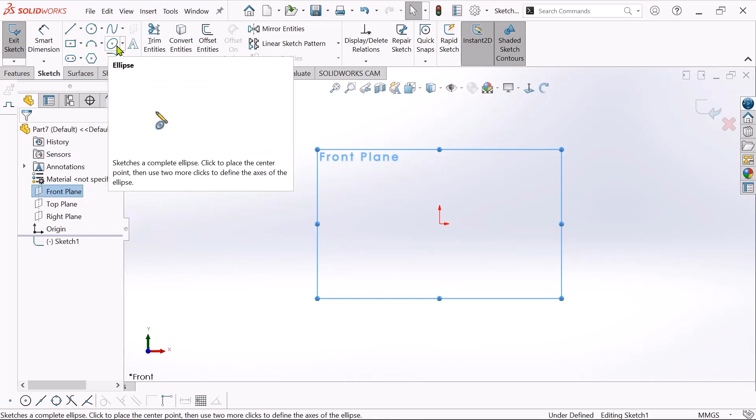Okay, let's start. Now go to front plane and sketch. Choose an ellipse, sketch the ellipse from this to this, and select OK.

Now go to smart dimension. Make it from this point to this point, 350, click enter. Again choose this point to this point, make it 700 millimeters, 700, and click enter.

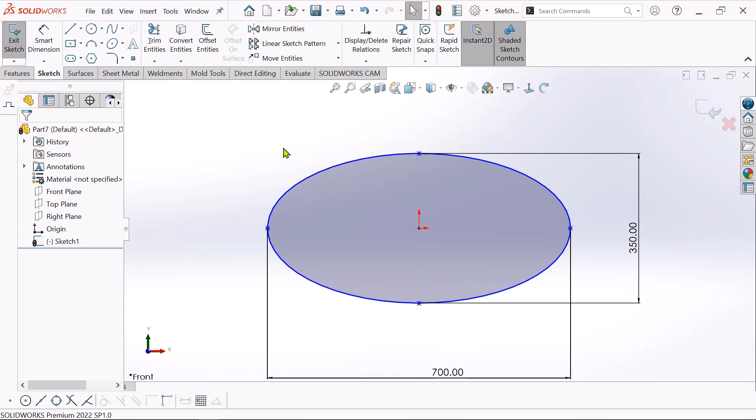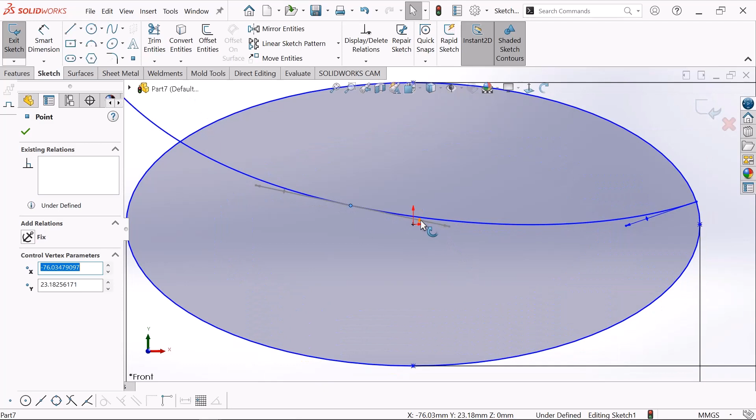Now again just select and sketch from this line to this line, and select OK. Now click this line and just drag it, this line and drag it, and again drag this, move it a little, drag it, yes, okay, and click OK.

Now just click this line and click offset entity, make it 20 millimeters, and select OK.

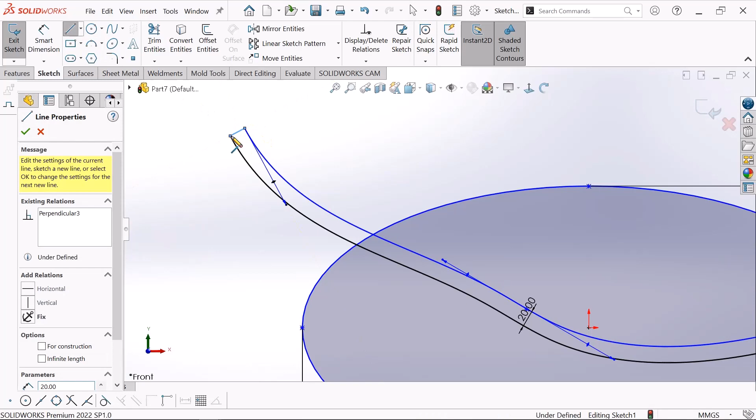Just go to this line and connect this line to this, select OK. Connect this line to this line, select OK. Again connect this line and this line, select OK. Just click exit.

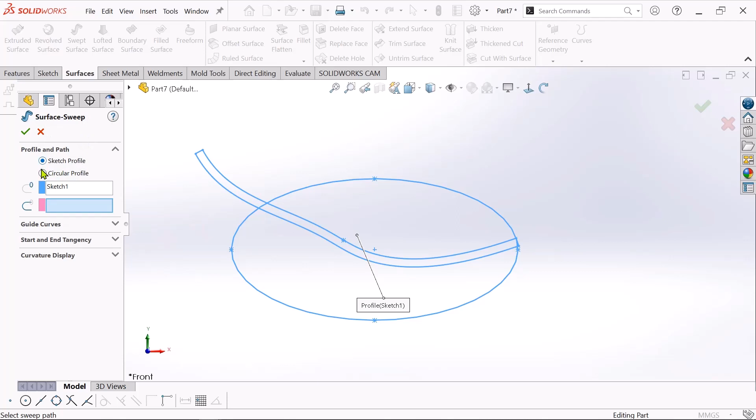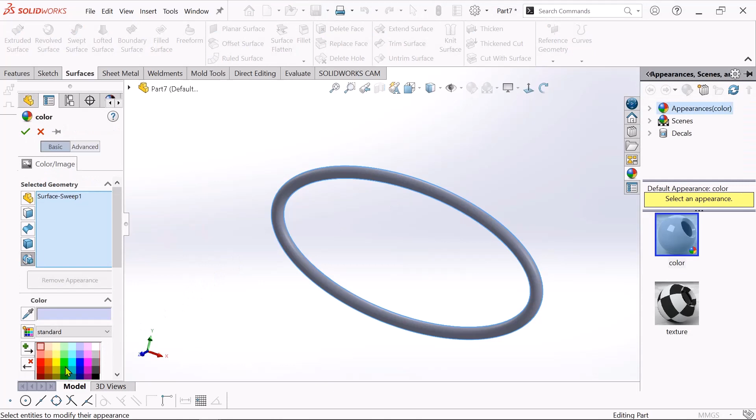Okay, just go to surface and click sweep surface, choose circular profile, click this profile and click OK. Make it 30 millimeters and click OK. Now click this and go to appearance, click this sweep brush and make it this color, click OK.

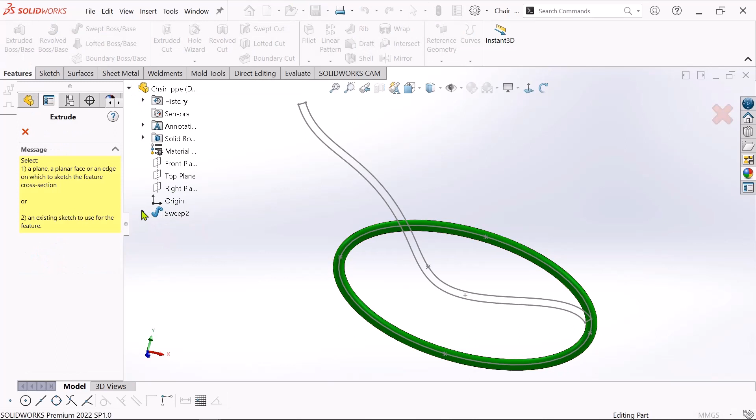Now click this and click show, select OK. Go to feature and click extrude boss, go to here and click this sketch, select this and this. Make it 350, merge result, and select OK.

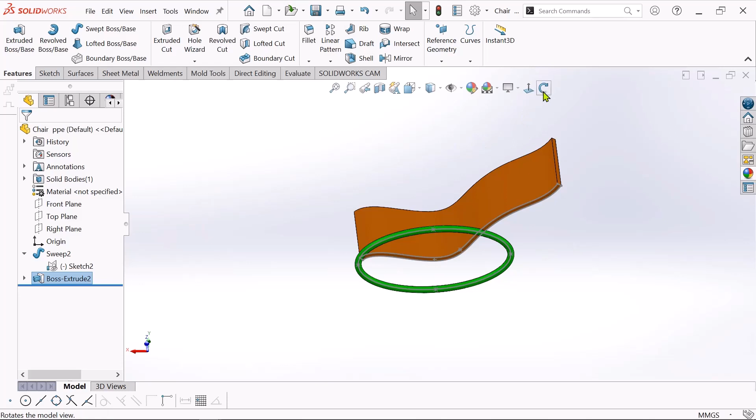Now go to plane, click plane, and select this point. Second reference is front plane. Click OK.

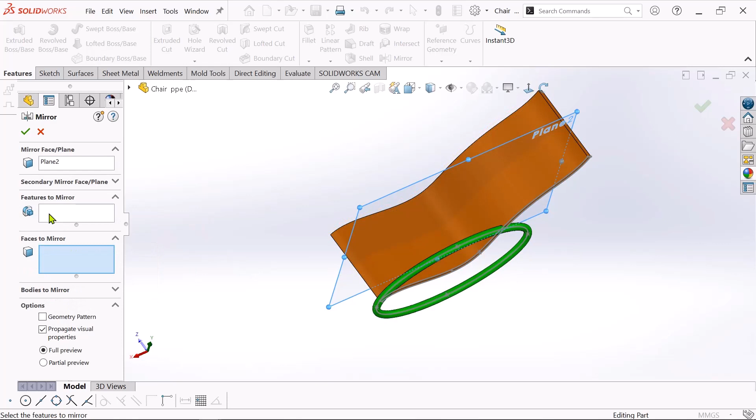Now go to mirror and click this feature to mirror. This is our feature, just click feature. This is our body mirror. Just click this feature, sorry, cancel it. Feature to mirror, this is our feature, yeah just OK. Click here, this is our feature to mirror, and click OK.

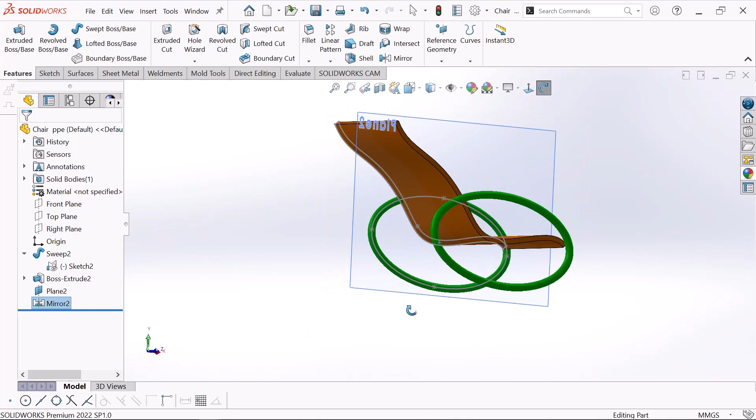Now see, both sides' circle is ready as a leg. Just click this and hide this plane.

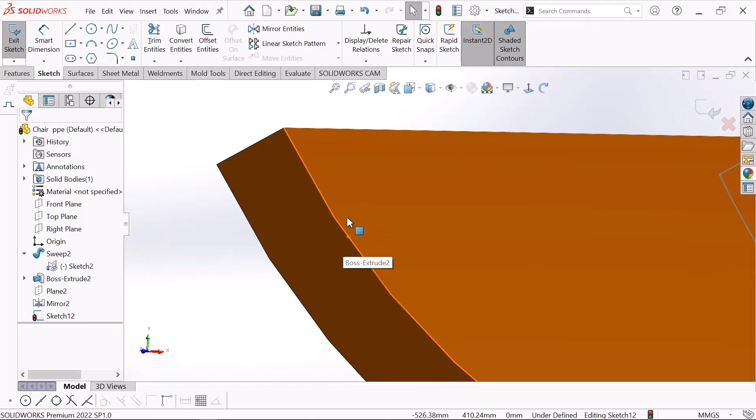Okay, just click this face and sketch. Now sketch a line from this line to this, and this line to this, and this line to this line, and this line to this line, and select OK.

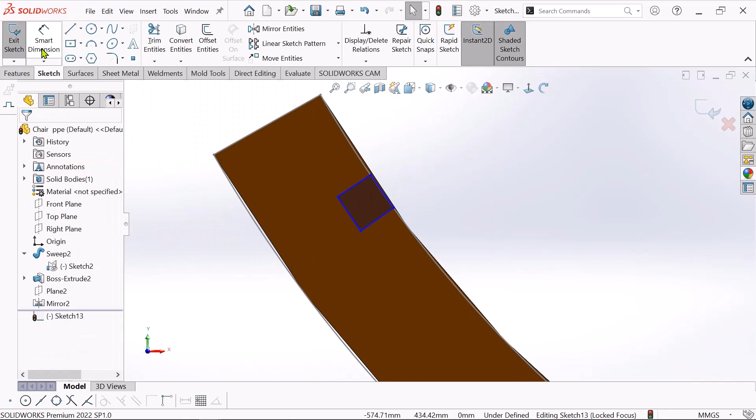Now assign the dimension from this point to this point, make it 20 millimeters, click enter. Make it from this line to this line, 2 millimeters, click enter, and make it 2 millimeters again, click enter.

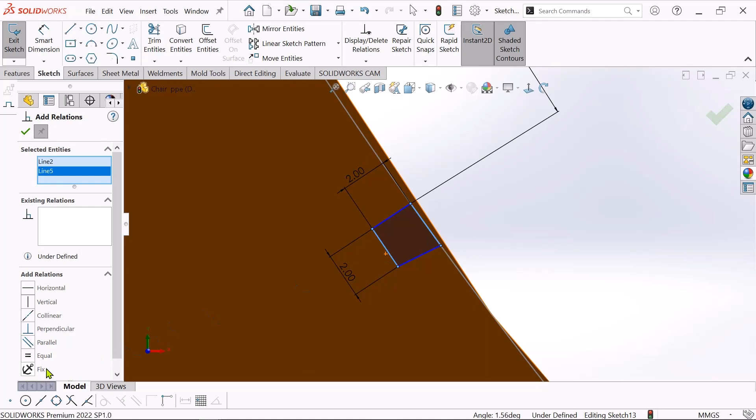Now go to add relation, click this line and this line, click equal, and click OK. Now our sketch is fully defined. Just right click, select OK, and click exit.

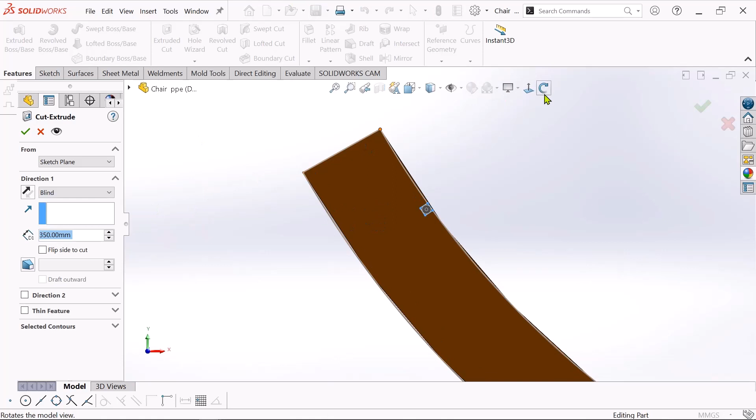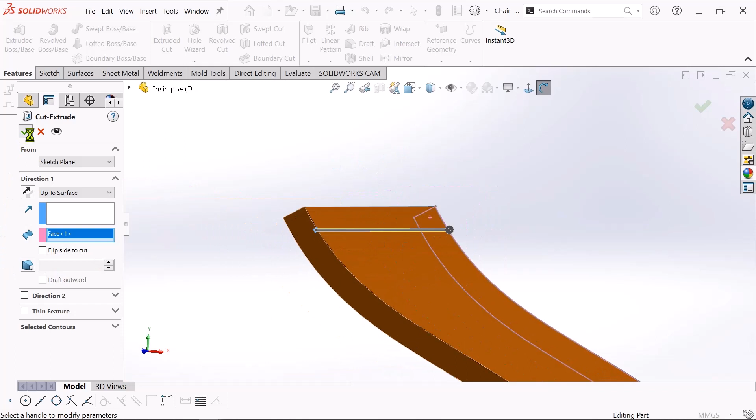Now go to extrude cut, just click this and click up to surface, and click this surface. Now click OK. Now see, our extrude cut is okay.

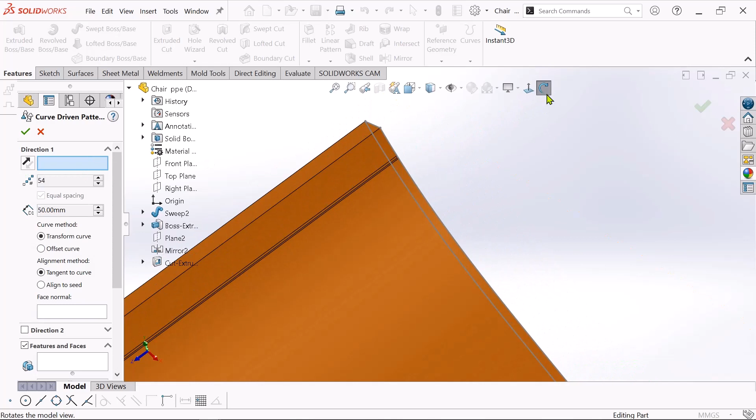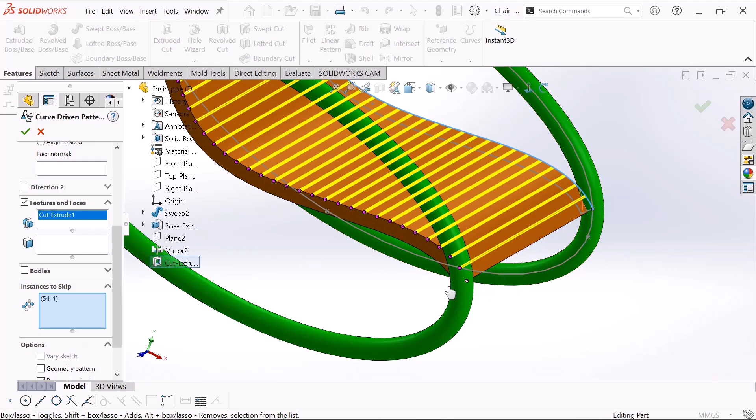Now go to this linear pattern and click curve driven pattern, choose this. Direction will be this line, go to Features and Faces. This is our feature face. Now our face is visual, so go to instances to skip, click this, click this because we don't need this. Okay, now click OK.

Now see, our chair is fully ready. Yeah, thank you.

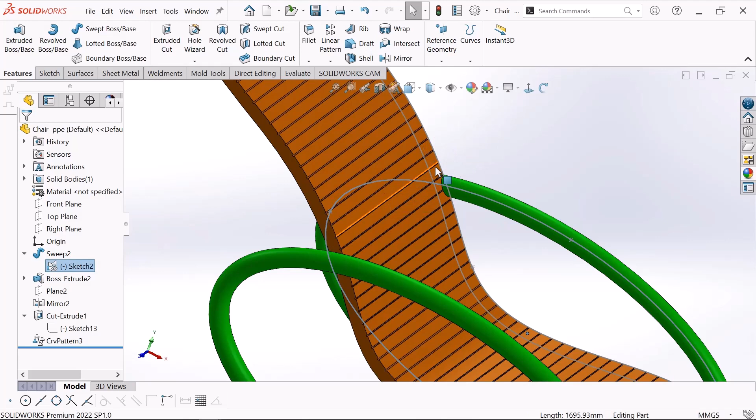Just click this and hide, and just see, this is the simple chair. Okay, thank you for watching.